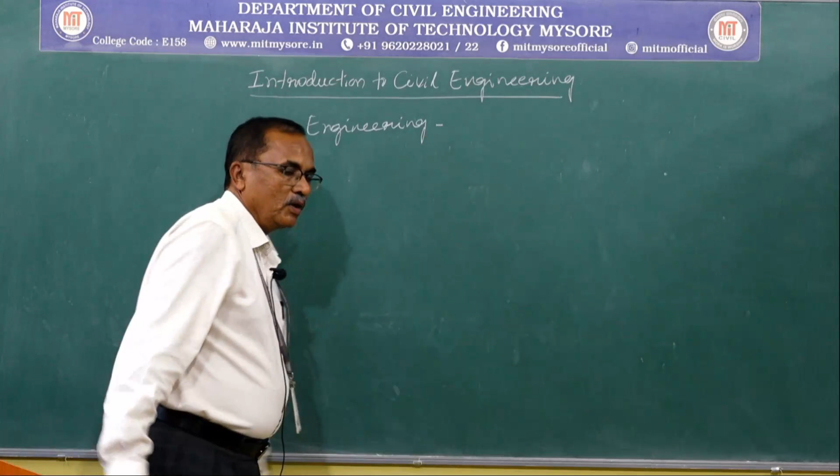Let us start with the meaning of engineering. Engineering is the use of science and mathematics for appropriate application.

Then after understanding engineering, let us understand civil engineering. Civil engineering, as the name itself implies, is for the civil society. Civil engineering is the professional practice of planning, analysis, design, construction and maintenance of various infrastructural projects.

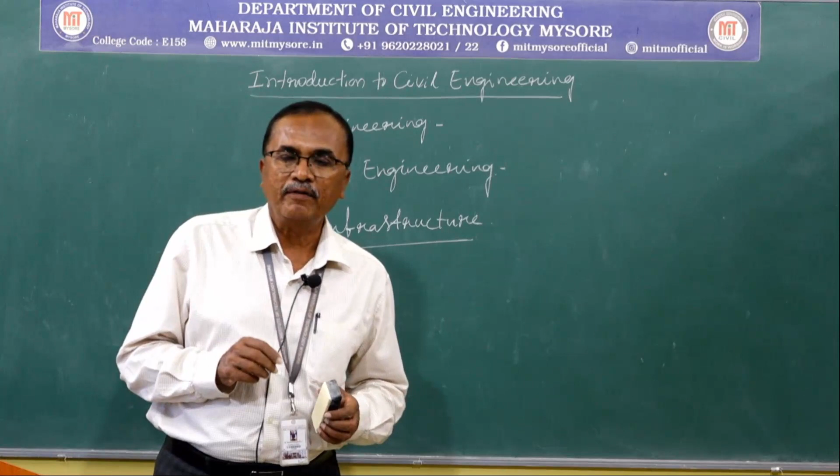What is infrastructure? Infrastructure is a set of facilities required for the socio-economical development of a society, in particular a state, a country, a globe in general. Socio-economical development of a country purely depends upon infrastructures.

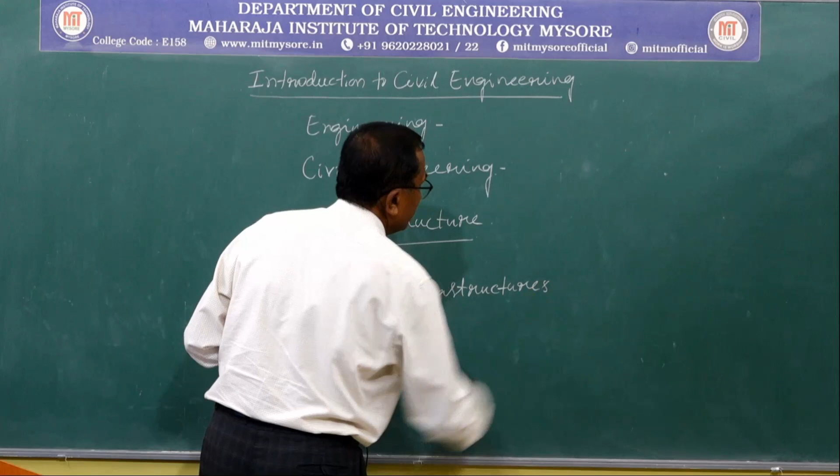Infrastructures are of three types, namely hard infrastructure, or structures, physical facility provided. Here we provide physical facilities such as...

roads, railways, airways, waterways, bridges, tunnels, etc. These are all the physical facilities.

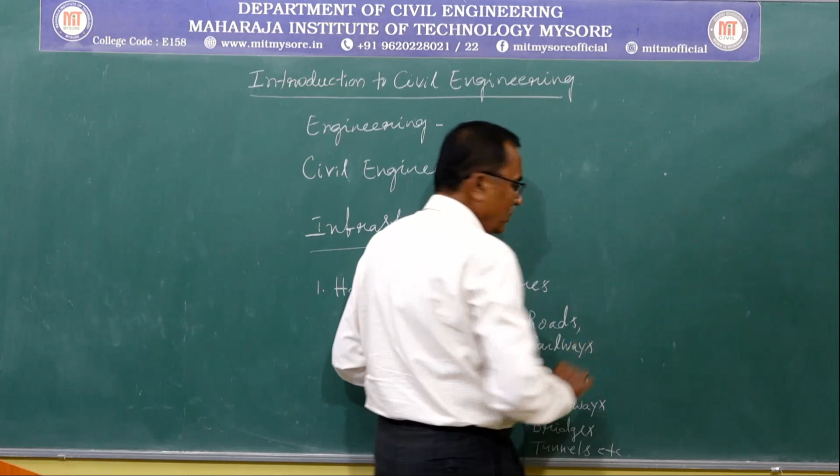Roadways, nowadays we know that it is road facilities. Good road facilities are the economical boon. Wherever we find the good road facilities, there we can automatically find the socio-economical growth of the country.

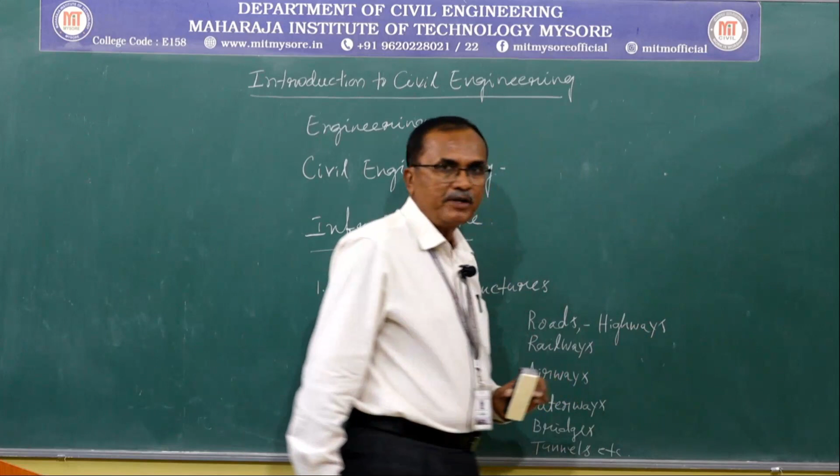Roadways, varieties of roads we come across highways of different categories or expressways. Similarly, railways, airways including airfield, airport.

Then waterways including the seaports. Seaports means it is there we are going to land the ships and all cargo operating vessels.

The bridges which connect, which shorten the communication of road transportation or railway station transportation. A tunnel, again, is a means of communication to carry or transport vehicles, to transport water from one side to the other side, and so on and so forth.

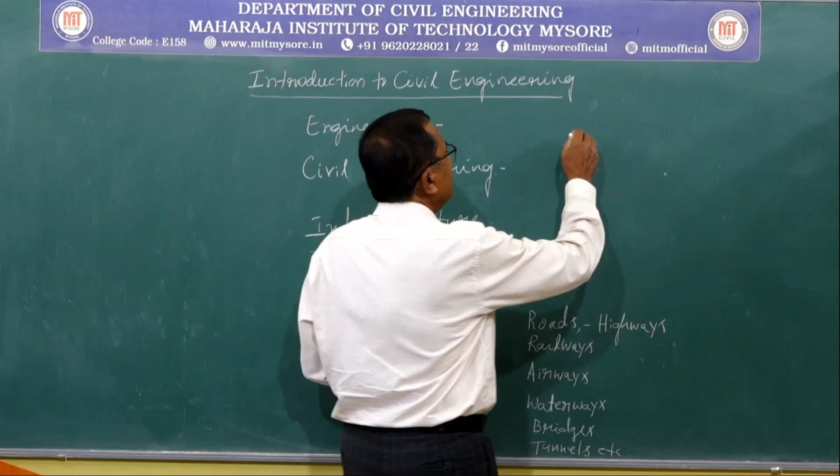The second type of infrastructure is soft infrastructure, human resource and institutions, which monitor the economy.

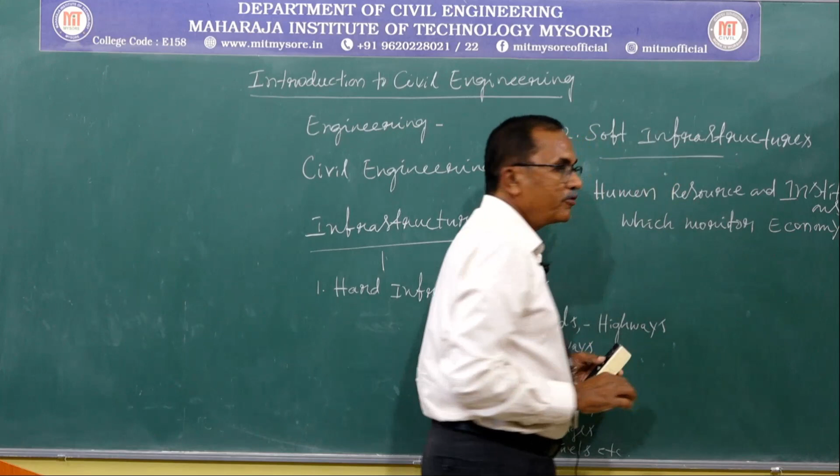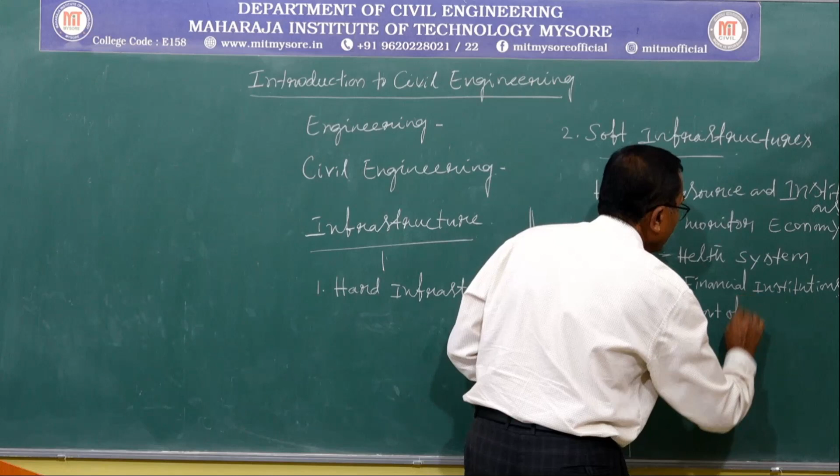The soft infrastructures include financial institutions, government offices, education institutions, law enforcements. Health system is coming under health system - it is hospitals, educational institutions, again finance institutions such as banks, government offices, various government offices, educations, varieties of educational institutions, professional, non-professional, higher and lower education systems, then law enforcement such as the police forces.

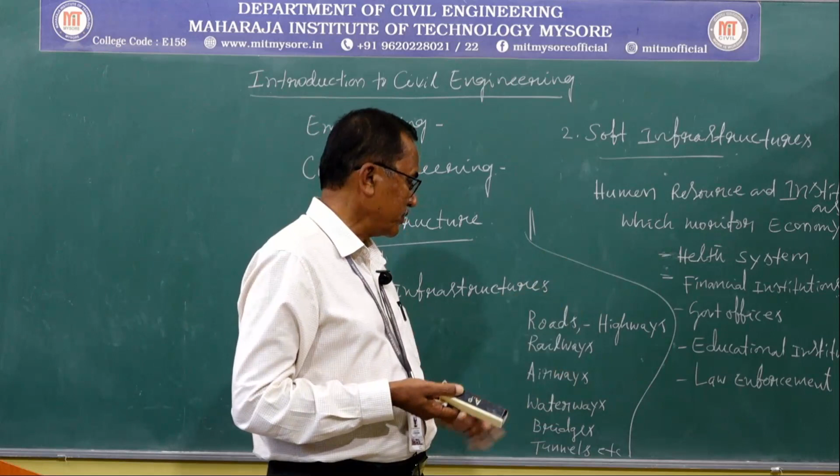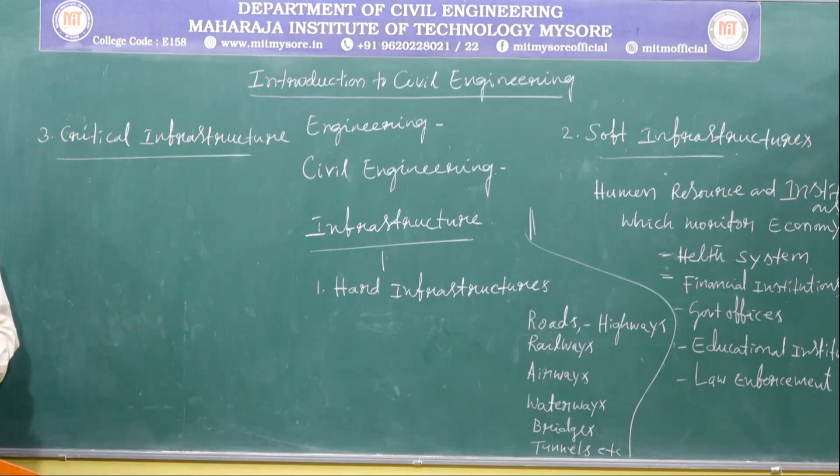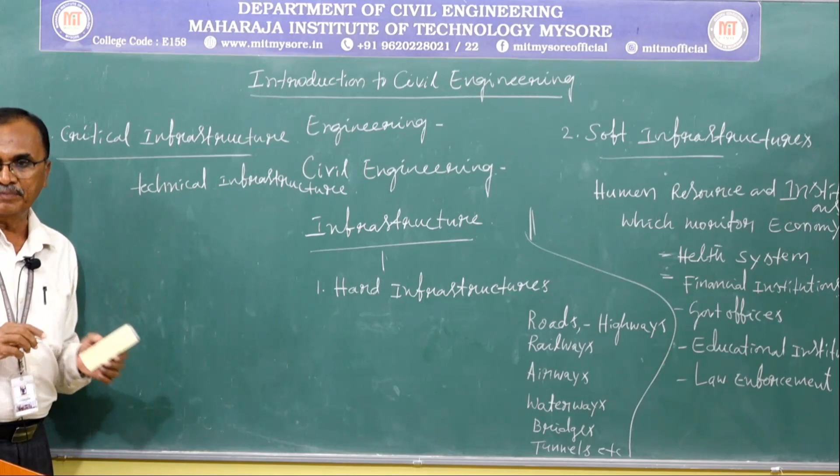And the third infrastructure is critical infrastructure. Critical infrastructure, basically they are all technical infrastructures. Here sophisticated technology is involved in providing technical infrastructures, involving networking, cable connection, power supply, and power grid.

Then transport system, traffic management system, and the last one is water supply and sanitation. Infrastructure means set of facilities required for the socio-economical development of a society or country or nation or the world.

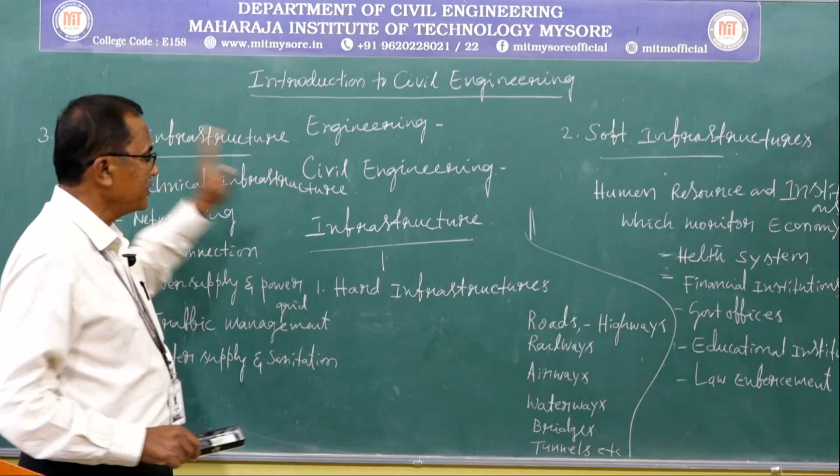Various infrastructures are broadly classified into three categories, namely hard infrastructure, soft infrastructures and critical infrastructure. Hard infrastructures are physical facility providers, namely roads, highways, varieties of highways, railways, then airways, waterways, bridges, tunnels. Here railways, airways, waterways include both rails, roads, buses and vehicles, aircrafts, and waterways include ships, containers, etc.

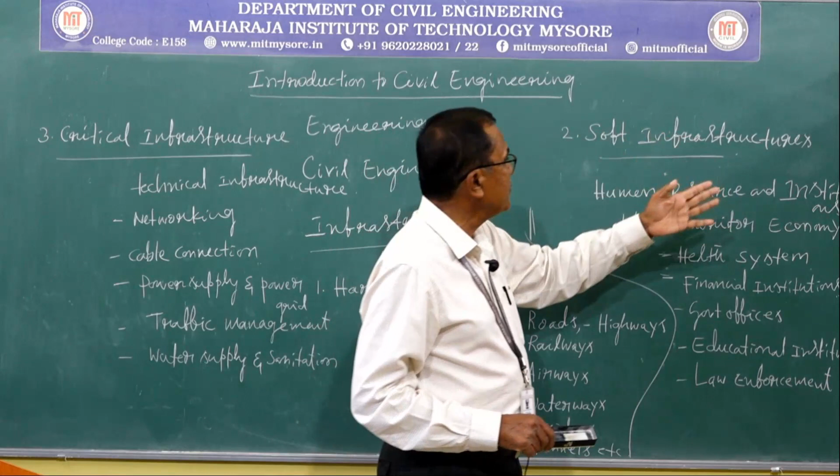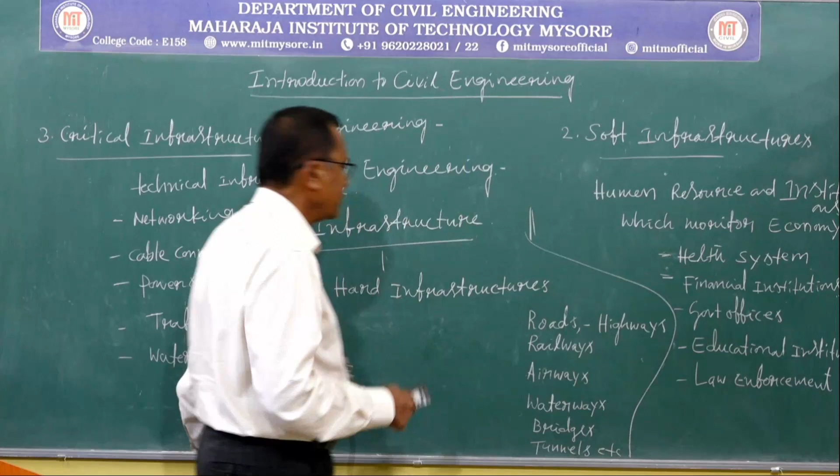Again, soft infrastructures are human resources and institutions which monitor the economy. So soft infrastructures are health system, financial institutions such as banks, government offices, educational institutions, law enforcements, mainly judiciary and the police force requirements and their infrastructure.

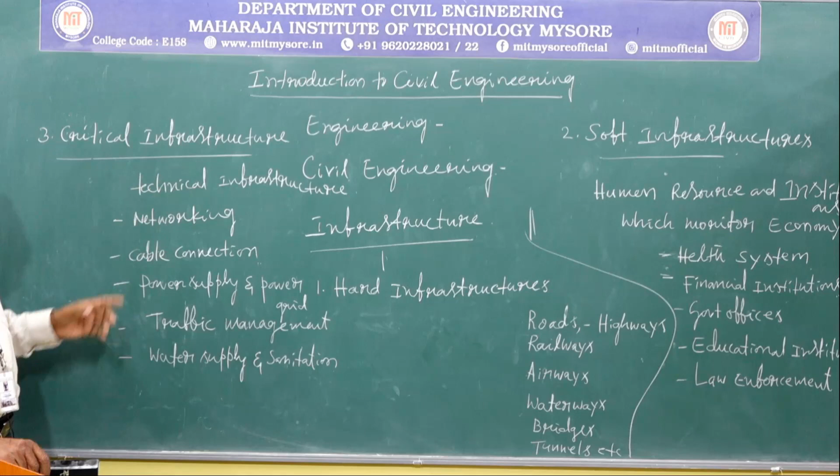Next it is critical infrastructures or technical infrastructures, and here sophisticated technologies are involved in providing this critical infrastructure. The most commonly used critical infrastructures are networking, cable connection, power supplies and power grid system, then traffic management system and water supply and sanitation.

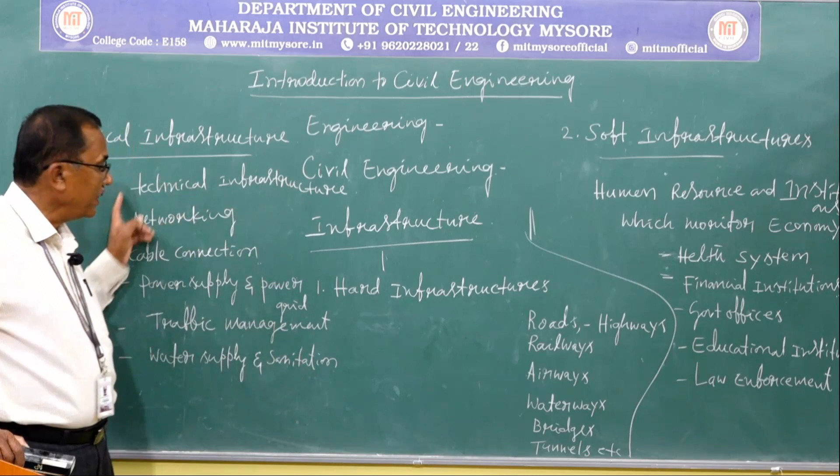These are all dynamic in nature. Critical infrastructures are dynamical in nature. Instantaneously, within a short duration of time, it is possible to provide this infrastructural facility wherever its requirement arises. We have seen varieties of these infrastructures. Civil engineering plays a vital role in providing all these infrastructures.

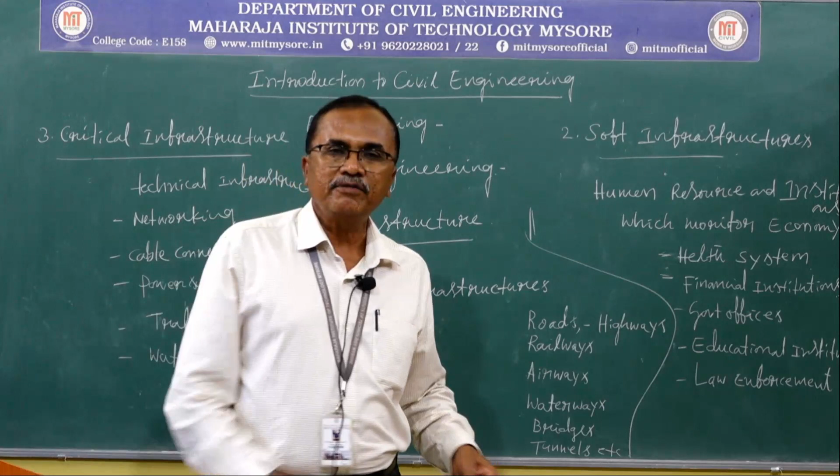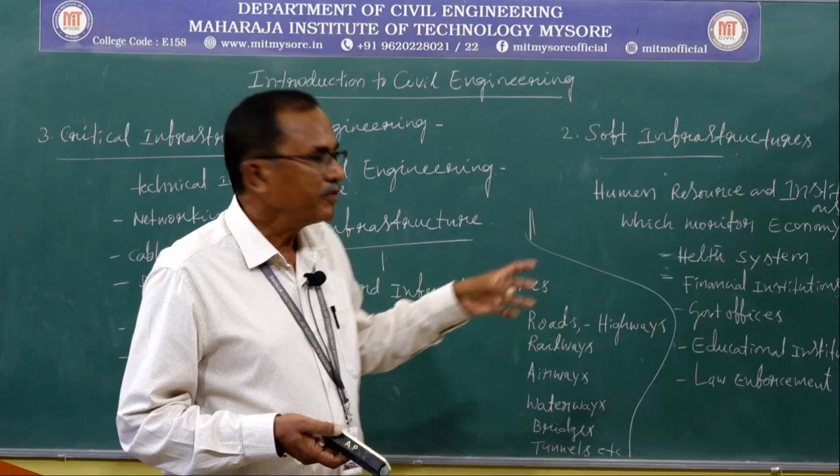The stakeholders should know about all these varieties of infrastructures in order to inculcate or understand the various infrastructures involved. Students, society, industry - these infrastructural facilities are included in the Introduction to Civil Engineering course. Every engineer, irrespective of the stream of engineering, should know about these infrastructural facilities.

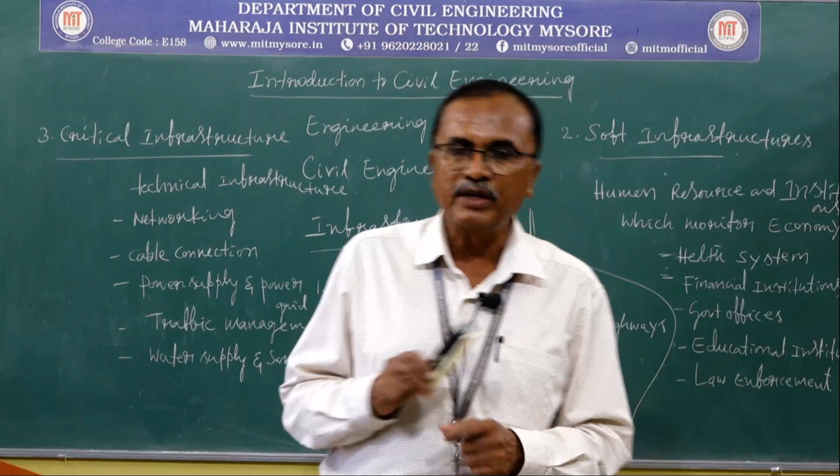A car owner should know at least driving rather than car manufacturing. Likewise, a road user or infrastructure user should know about the infrastructures rather than constructing roads. That's why this infrastructure facility is included in Introduction to Civil Engineering.

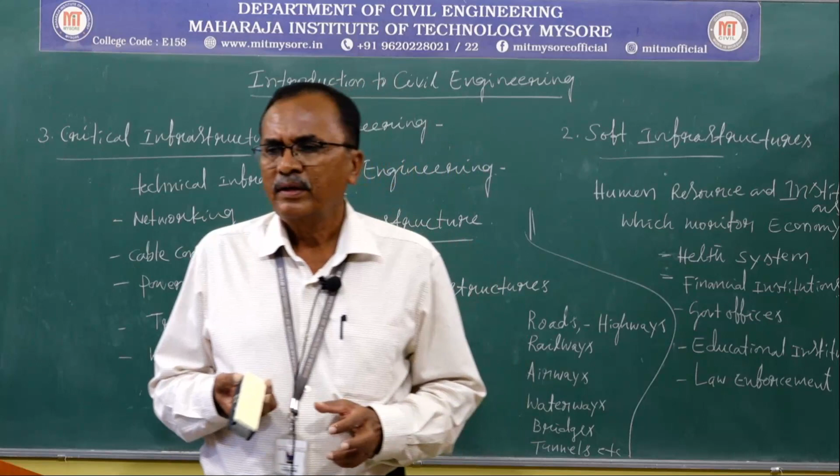These infrastructure facilities related topics you are going to study in the first and second module of Introduction to Civil Engineering. And to facilitate all these facilities, some specializations will be introduced, namely: in order to prepare planning and to prepare the map, we use the surveying specialization; and to study the movement of water, to store the water and construct dams, it is taken care of by hydraulics and water resource engineering.

Different types of foundation required depend upon the type of soil, which will be dealt with by geotechnical engineering. Design, construction and maintenance of various structures and structural elements will be carried out by structural engineering.

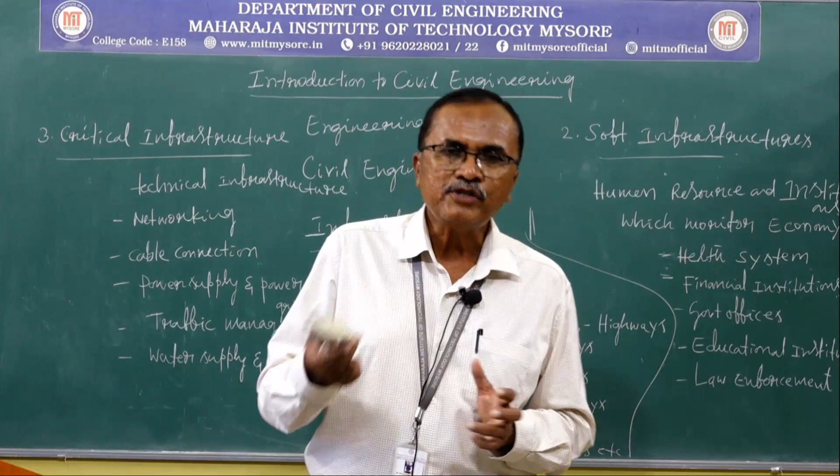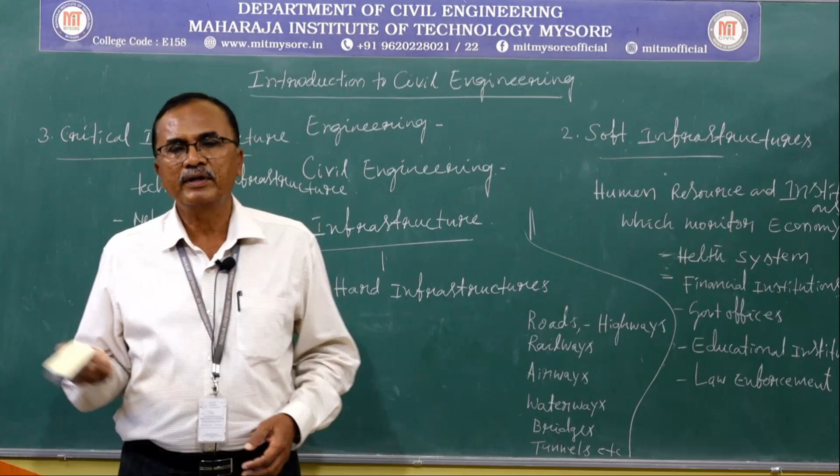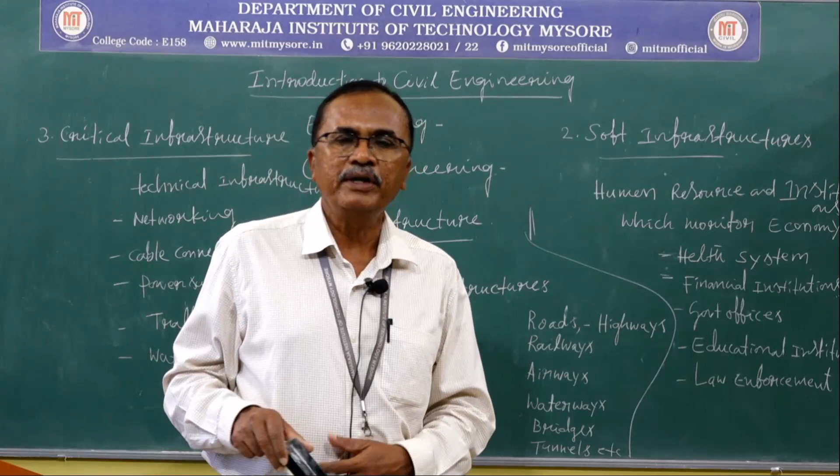Road requirements, railway requirements, construction, maintenance and usage of these facilities are handled by transportation engineering. The quality of water and wastewater, its use and disposal, is presented by water supply and sanitation engineering in terms of environmental engineering. All these specialized topics will be introduced briefly for better understanding, and later this concept will be used whenever you use these infrastructural facilities.

Apart from these infrastructural facilities, you are going to be introduced to a concept called engineering mechanics in the third, fourth and fifth modules. Engineering mechanics is a physical science which deals with the condition of rest or motion of a body or element of infrastructure. Here you will learn about force, system of force, types of forces, equilibrium condition, resultant, composition of force, resolution of force and so on.

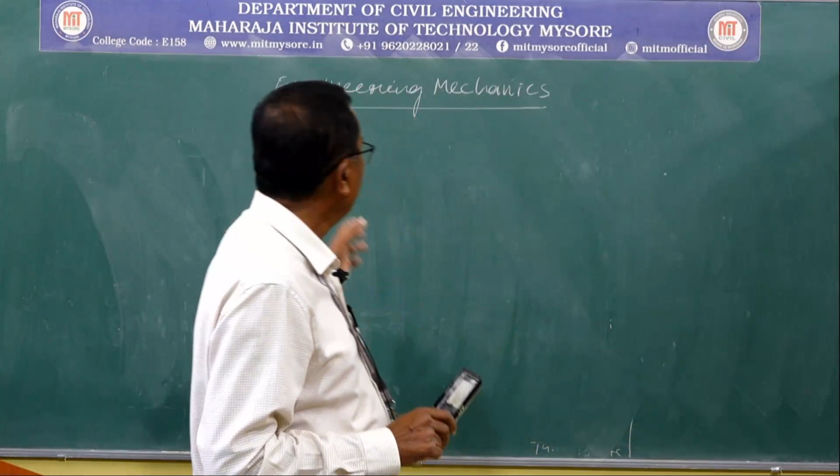In addition to these, before understanding force and its auxiliaries, you will study ideal conditions. The most commonly used idealization terminologies are point force, rigid body, particle and so on. In addition, you will also learn about centroid and center of gravity and moment of inertia.

All these engineering mechanics concepts, irrespective of the type of engineering, will be used in your day-to-day engineering life. They should remain memorized and stay with you till the last of your engineering career. It is an easy subject, very interesting, important, and a scoring subject in the examination. Various specialized faculty will handle this subject. Thank you for your patient listening. Wish you all the best.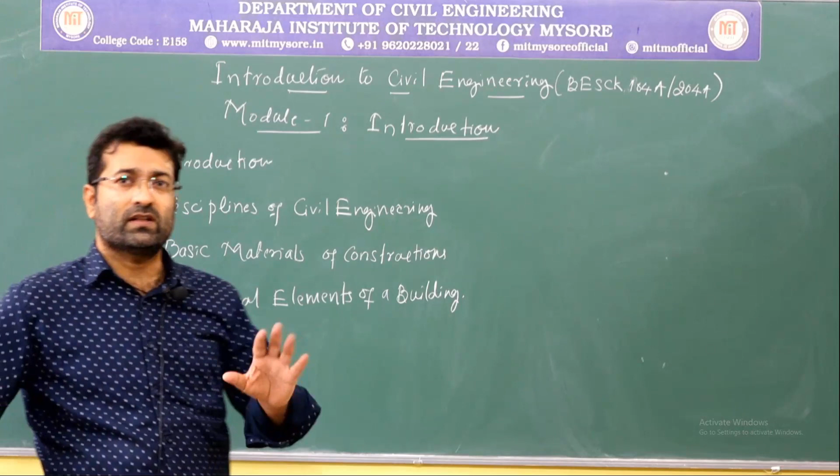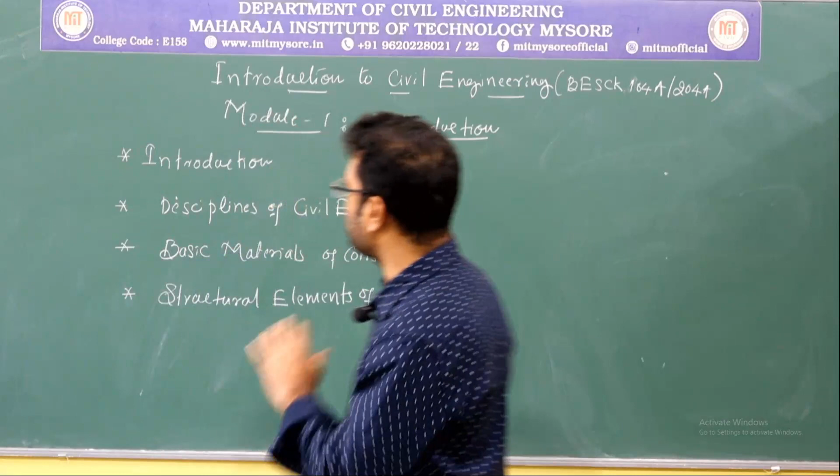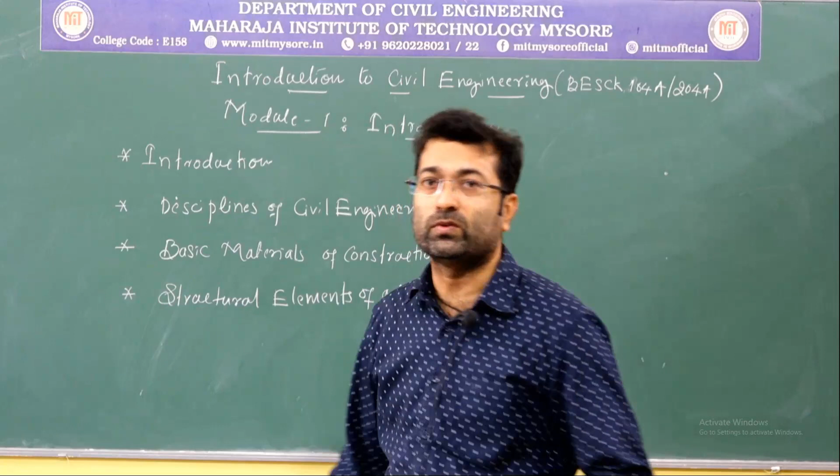It is common for many different branches in the VTU. I will be concentrating on the first module, which is Introduction. In this chapter, I am basically going to cover four different topics: introduction about the subject and civil engineering, discussing different disciplines in civil engineering, then materials of construction, and different structural elements of a building. So these are the four topics I will discuss in this module. Today I will concentrate on the introduction part, that is introduction to civil engineering.

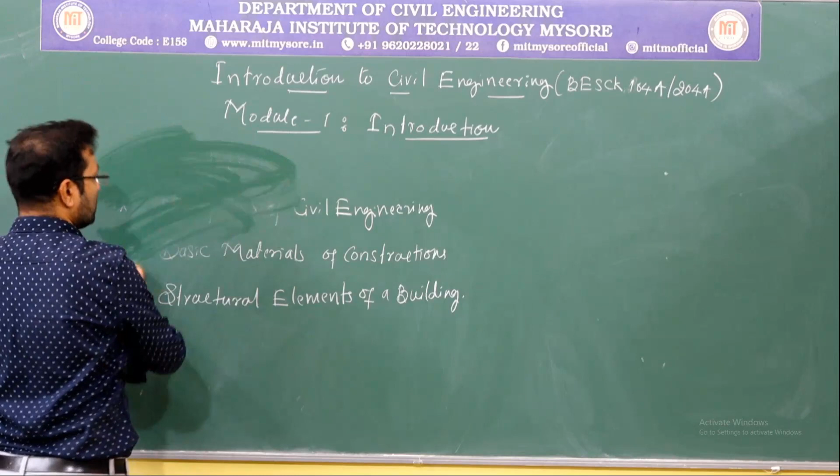So what is civil engineering, first of all? What is meant by civil engineering? Civil engineering is basically an art. It is an art of utilizing natural resources for the purpose of human habitation.

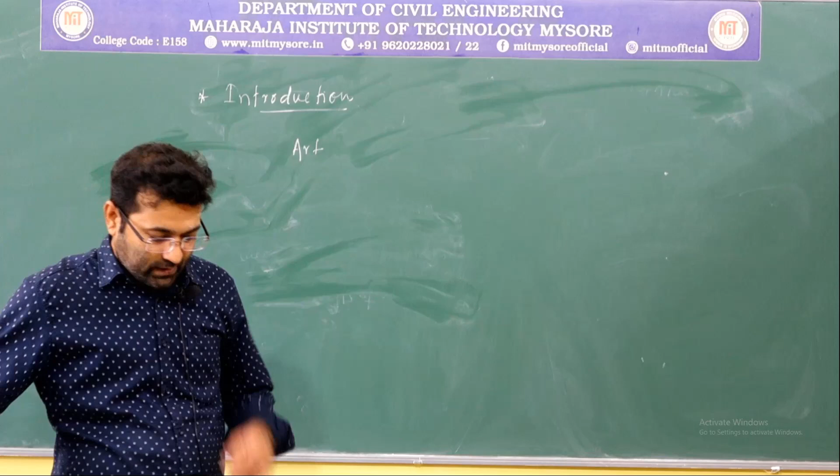For example, if I want to construct a house for residential purposes, what all different materials are required? I basically need many construction materials, like stones, wood, bricks, cement, sand. Many of these construction materials are naturally available, so I am utilizing naturally available materials. Apart from naturally available materials, we also make use of manufactured materials, like cement, concrete, or steel, which are again manufactured from naturally available materials. So basically civil engineering is an art where we utilize natural resources for human purposes, like residential purposes, water consumption, or any other industrial purpose. We are constructing things for the purpose of human needs.

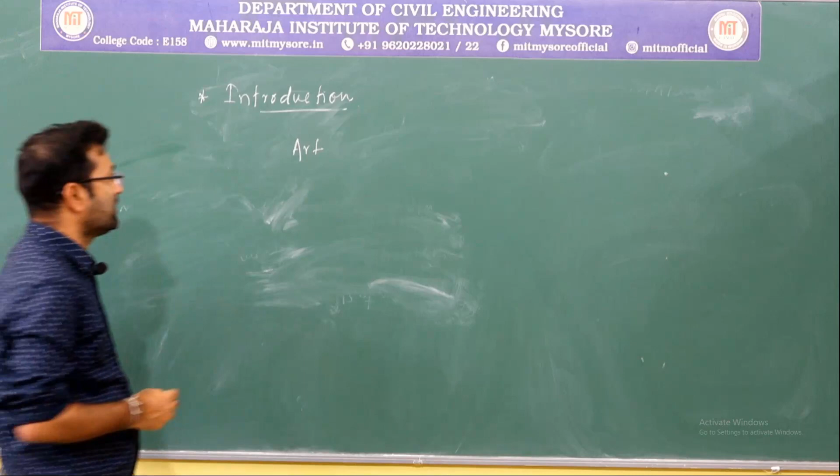So now, why do we need a civil engineer? Why is a civil engineer required? Can't we do all these things without a civil engineer? Do you really think a civil engineer is required? If you ask me, my answer is yes, we need a civil engineer. Without a civil engineer, we cannot go for any construction activity.

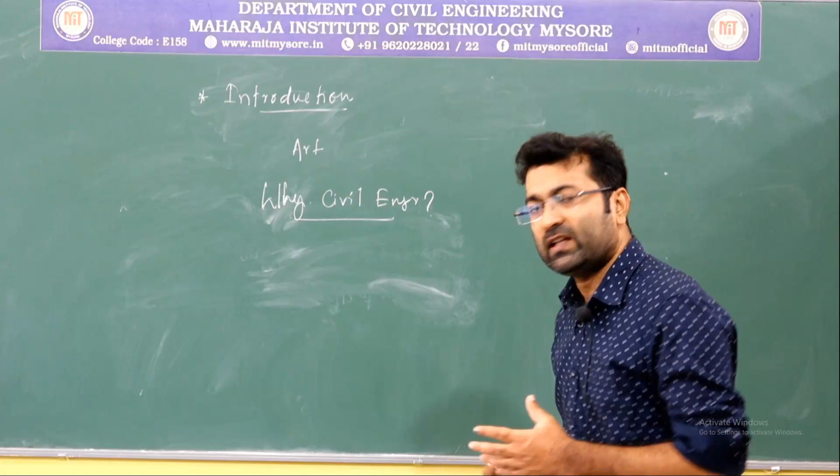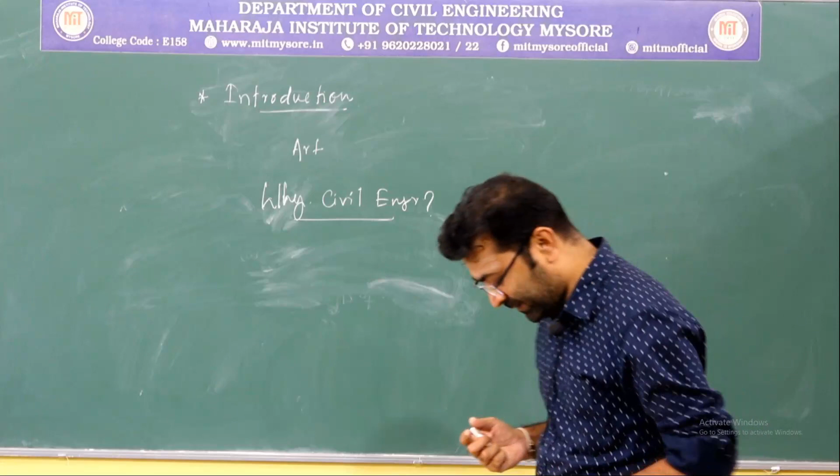The reason is, if you want to construct any structure, either it may be a residential structure, a building, a commercial building, a dam, a bridge, railways, roads, or any construction, any construction activity involves many different activities. It is not just one simple job, it involves many different activities. For example, if I want to construct a building, what are the different roles, responsibilities or activities we need to perform? Starting from surveying, then planning of the building, execution, finishing - there are many different types of activities involved.

Without an engineer, it is very difficult for any construction activity to be done. Even a common man can do the things, but it will not be economic, and those construction activities will not be performed economically. To achieve economy in any construction activity, the role of a civil engineer is very important. Without a civil engineer, we cannot do things properly.

For example, whenever I want to construct a school building, a college building, or an institution building, we should know the basic requirements in that building, so that a civil engineer can do the planning properly based on the requirements, then we can execute the things. If we are not a civil engineer, we will not know the basic requirements in a building. Then the planning and execution becomes very difficult, and even those kinds of buildings cannot be used properly, they will not function properly.

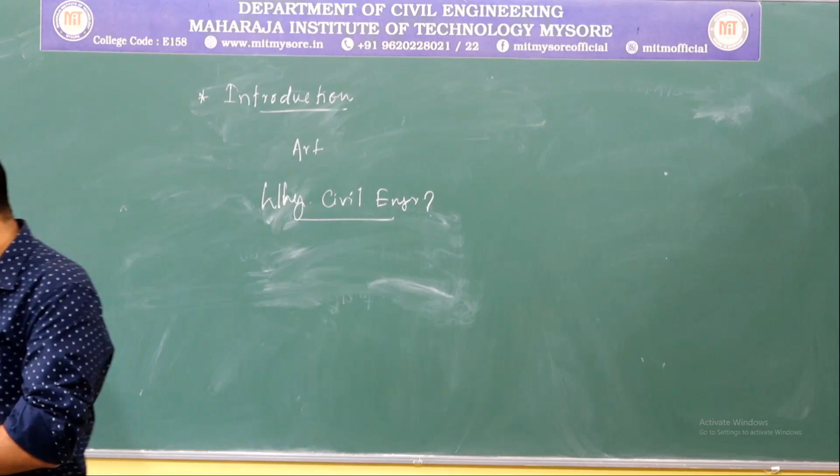Now, if I move on to the next topic, that is, what are the different disciplines in civil engineering?

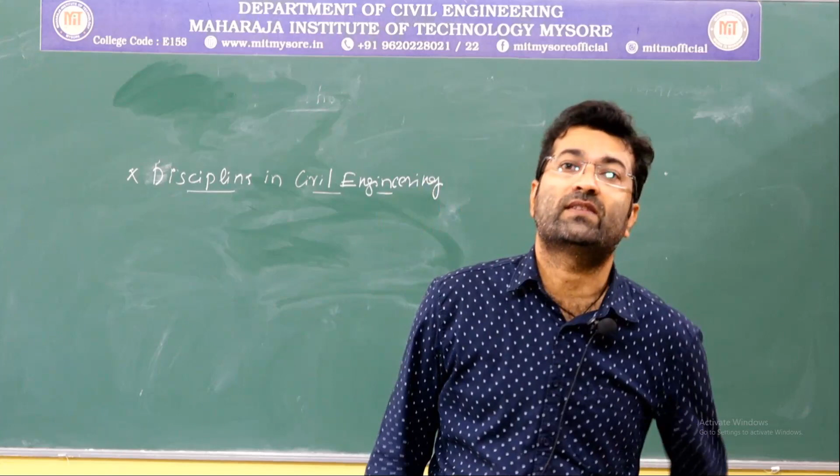What are the different disciplines in civil engineering? There are many different disciplines, or you can say fields, in civil engineering. It depends majorly on the type of construction activity. Here I would like to take an example of building construction, and we will be discussing the different fields in civil engineering.

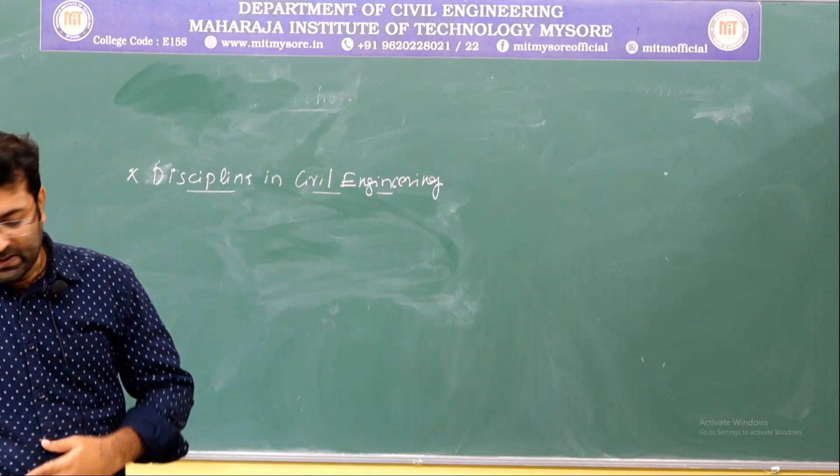If I want to construct a building, basically a residential building, it involves many different steps. The first step is, whenever we want to construct a building or any structure, the first duty is we should know how much area is available for the construction. So the measurement of the land or the area available, whether it's a residential building or any kind of building, wherever we are constructing, first we should know how much area is available. This measurement of the area deals basically with the field called surveying.

The first field or discipline in civil engineering is called surveying. Surveying is basically the first duty or job in any construction activity, where we will be measuring the area. It is basically the horizontal measurement of the ground or the land available for the construction area. The one who deals with all these measurements of the land and puts the entire area on paper, that is the job of a surveyor. So this is the first branch or field in civil engineering, surveying, which deals with the measurements of the land.

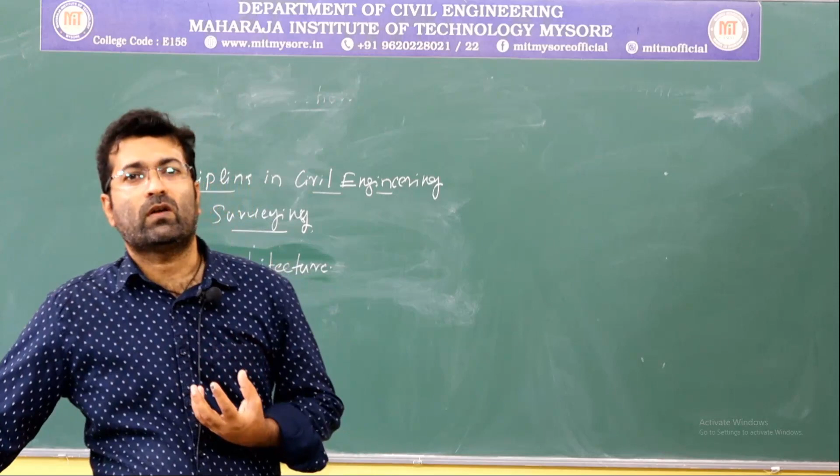Then the second branch or field in civil engineering is architecture. An architect is the person who basically plans the different components in the building. For example, if I want to construct a residential building, I should know where the different components of the building are - like bedrooms, living area, kitchen, bathrooms, puja rooms. So all these are the different components in a residential building. The architect is the one who fixes all these components of a building within the available area.

Nowadays architecture has gained more importance. That is why, instead of being just a part of civil engineering, architecture has now taken an important role and has been made into a different branch called architectural engineering, though it is basically a part of civil engineering. So surveying is the measurement of the land, and within that available land, the architect fixes the different components of the building. After architecture, the next important field in civil engineering is structural engineering.

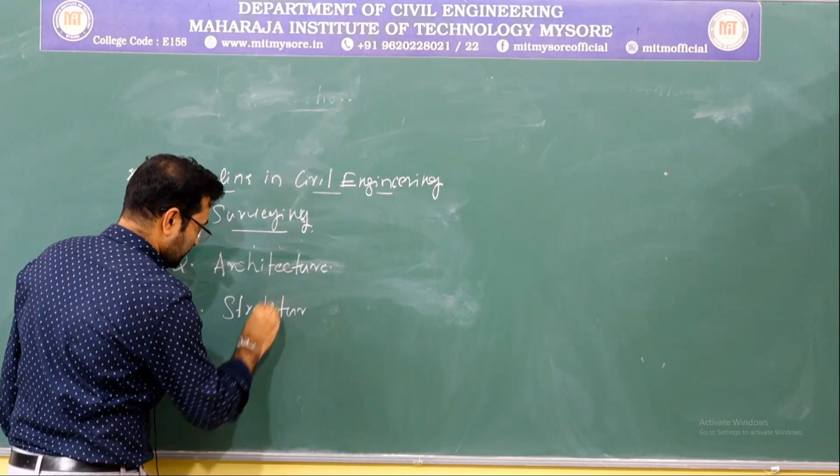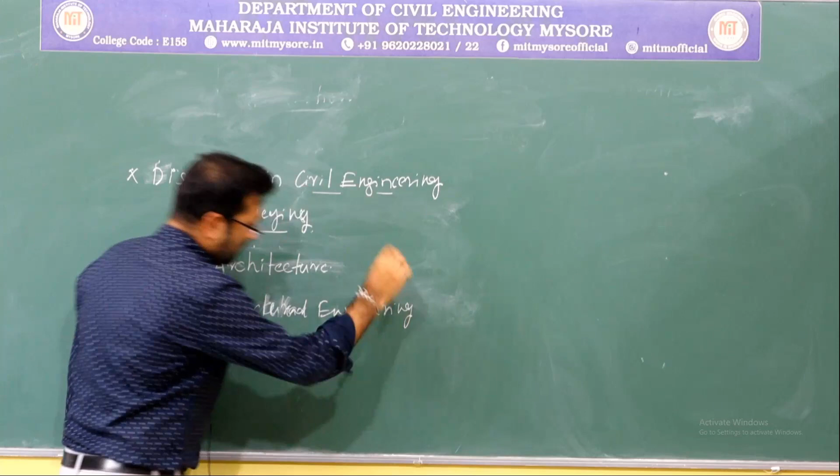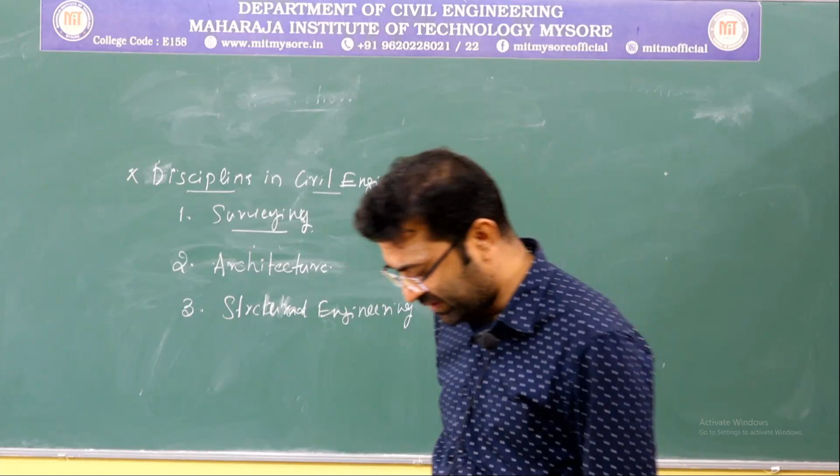Structural engineering is one of the main components or branches in civil engineering, where the entire structure stands on the structural components of the building. For example, if I take any building, the structural components are like foundations, columns, beams, and slabs. All these are the structural components, and these are important components in the building which carry the load, or transfer the load from the superstructure to the substructure. Ultimately, whatever load the building has is transferred to the ground through these components. Designing these components will be done by a structural engineer.

The structural engineer is the one who decides what should be the geometrical dimensions, like the sizes of the beams, columns, slab and foundations, and also what should be the percentage of reinforcement we need to provide in the beams, columns, slabs and footings. So we can say this is the bones in the body which takes the entire load.

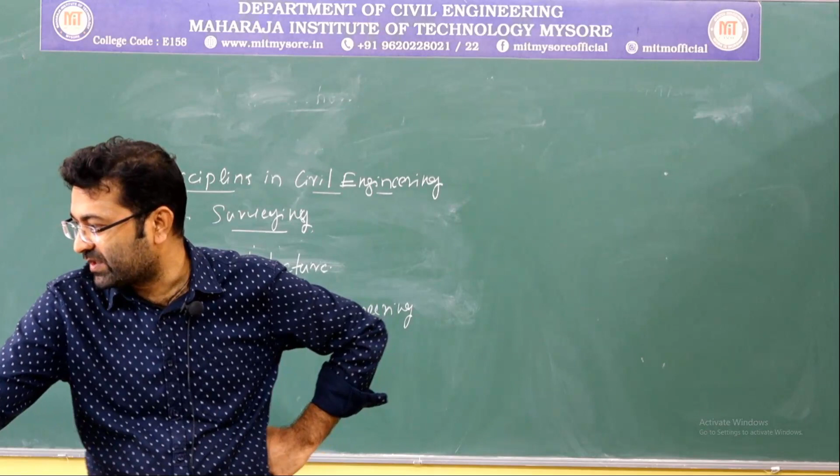So the structural engineer has the most important role in any structure, as he is the one who decides whether a building is safe or unsafe for the superimposed loads. After structural engineering, the next one is geotechnical engineering.

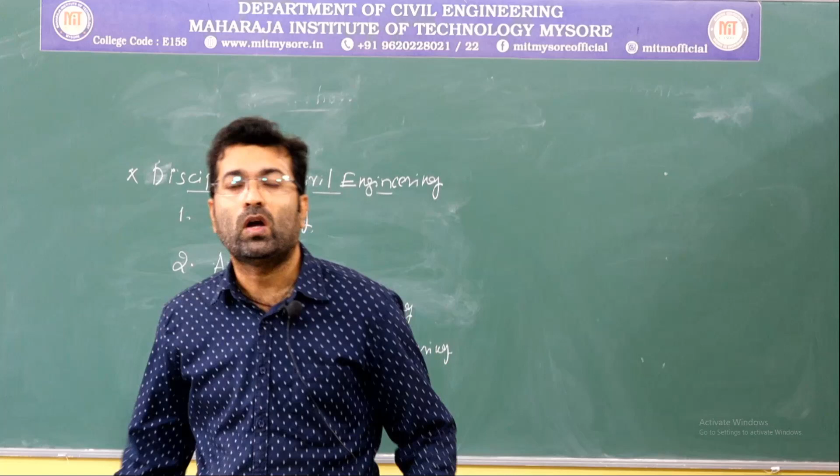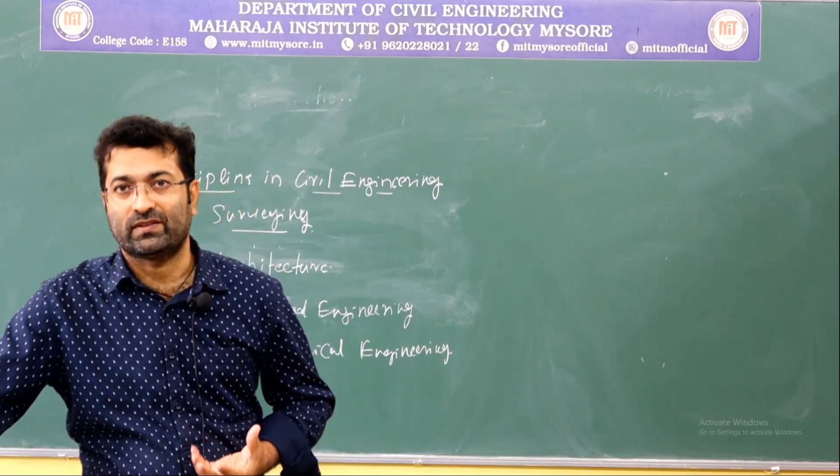The role of geotechnical engineering in civil engineering is very important, because all the structures we construct are standing on the soil or on the ground. So how the soil reacts when we construct structures is important to know, because in different locations, soil is of different kinds, and these soils behave differently for many reasons. For example, take a black cotton soil: the expansion and contraction is very huge, so we cannot construct structures on black cotton soils very easily.

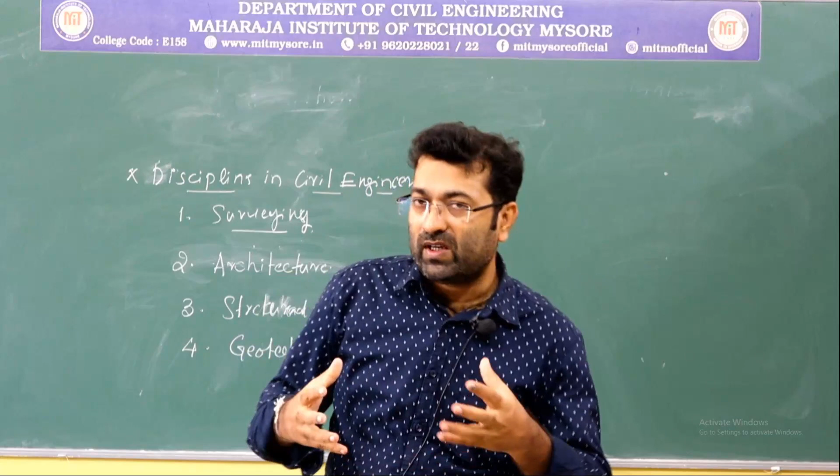We need to treat the soils. So the one who deals with the behavior of soils in different localities and during different seasons is the geotechnical engineer. And whenever we construct buildings, those structures have weight, which ultimately we need to transfer to the ground.

Whenever we transfer loads to the ground, the soil has a capacity called load bearing or safe bearing capacity. How much load it can transfer or withstand from the superstructure is decided by the geotechnical engineer. The geotechnical engineer conducts many different investigations on the soil, and finally comes out with what will be the safe bearing capacity of the soil.

Based on the safe bearing capacity of the soil, the structural engineer will design the foundation part of any structure.

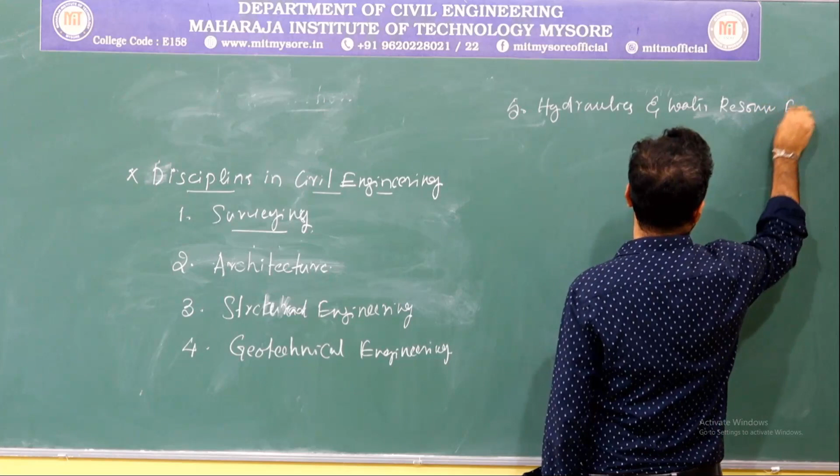The next field is hydraulics and water resources engineering, the fifth field. This is a little bit different in civil engineering, where we deal with water.

Whenever we have a residential community or an industrial area, we need to supply water to it. Supplying water to a community, city, or village involves many steps. First, there should be some source of water, and only then can we supply water to a community or an industry. For example, if I am supplying water to Bangalore, in Karnataka state, what is the source of water for Bangalore city?

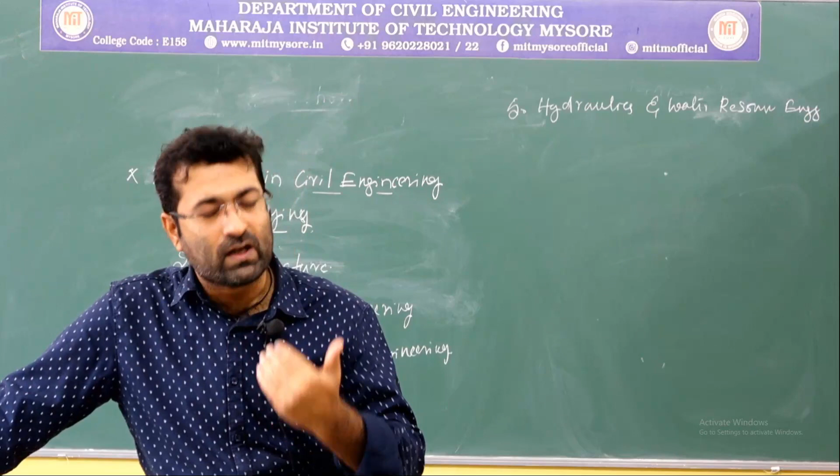The source for the water supply of Bangalore city is the Kaveri river. So when I have a source, I need to transfer the water to Bangalore city, which is around 80 or 90 kilometers away. I need to carry the water from the Kaveri river to Bangalore city, about 80 kilometers away.

A lot of structures are required for this. The one who deals with calculating the water requirement of Bangalore and transferring that water from the Kaveri river to Bangalore is the hydraulics or water resources engineer.

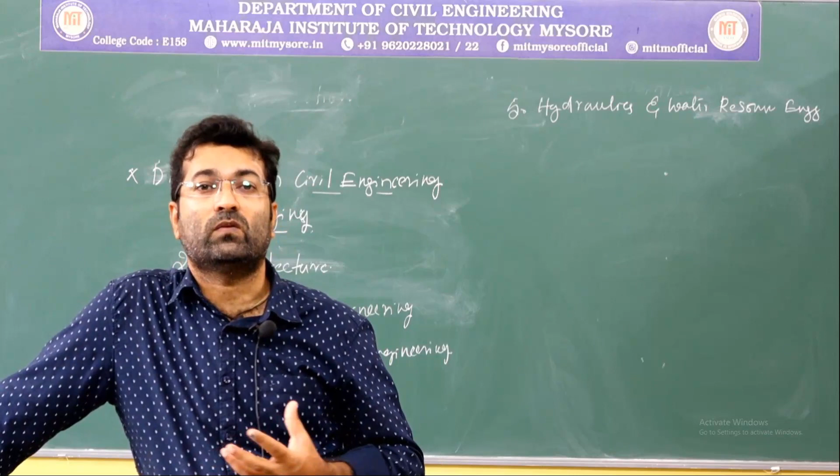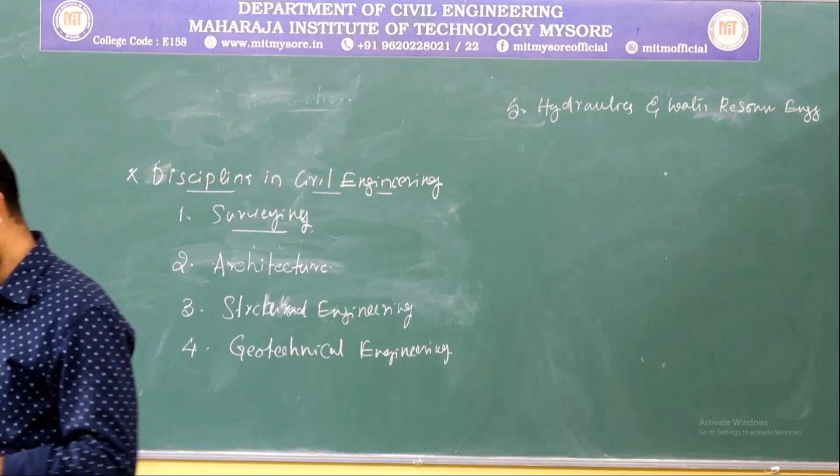They calculate the per capita demand and the total water requirement for a city per day. Based on that, they construct different structures and design pipelines to carry the water from the source to the cities. So the one who deals with all these things is the hydraulics or water resources engineer.

Then the next one is transportation engineering, the sixth field.

When it comes to transportation engineering, this is the discipline dealing with the transportation of goods and people. There are four different modes of transportation: the first one is roadways, the second is railways, the third is waterways, and the fourth is airways.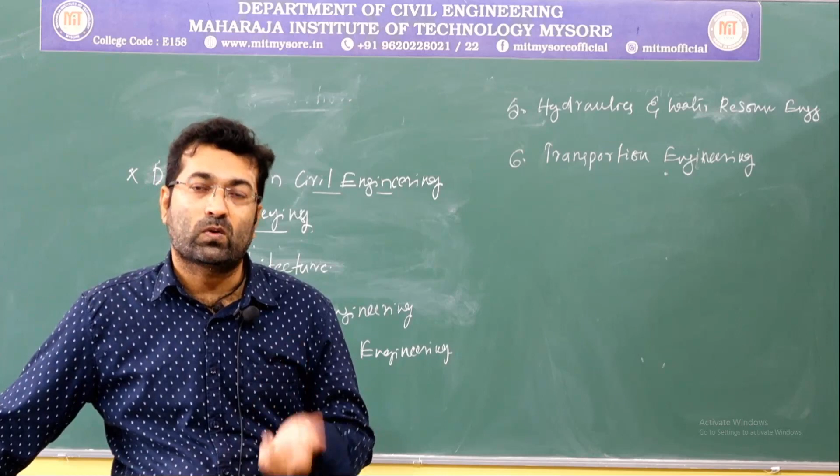The cheapest mode of transportation as of now is waterways, but it is not available everywhere, only in coastal areas. Roadways and railways are the most common modes of transportation, and airways is one of the costliest modes of transportation.

So usually people prefer either roadways or railways. The one who designs the different modes of transportation is the transportation engineer. If I need to transport goods or people from one place to another, for example from Bangalore to Mumbai, then I basically need roadways.

So whenever I am using roadways, what are the different components or infrastructure I need? Basically I need the roads. Then wherever there are obstructions, I may need to construct bridges. Then if I am transporting things by vehicles, I need different stations, like bus stations or other types of structures.

So the one who decides all these things, what should be the width of the road, what speed we need to maintain, all those things - the transportation engineer is the one who basically designs or deals with the transportation of vehicles by any means.

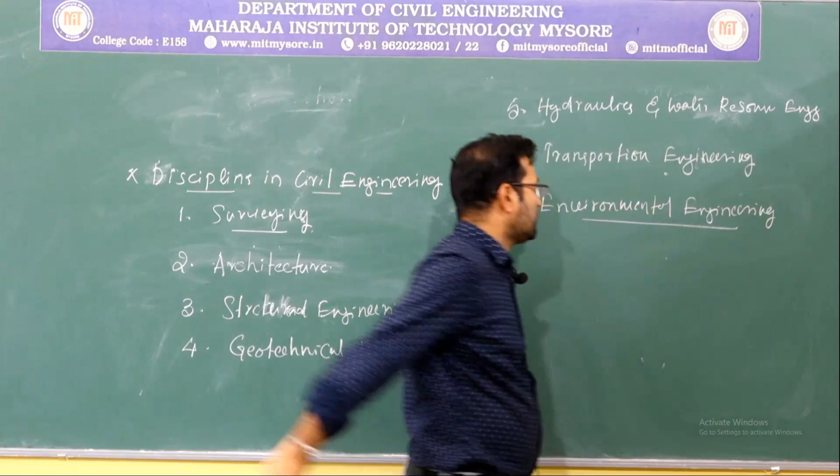The next one is environmental engineering. This is a branch which basically deals with how to maintain a good environment. Whenever we construct structures, especially industrial structures, there is a lot of pollution caused to the environment, so we need to control the pollution caused by different structures which we are constructing.

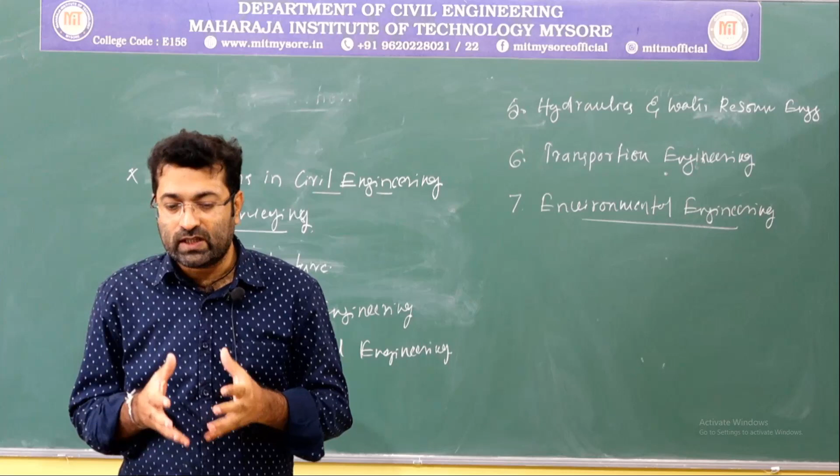As I mentioned with transportation engineering, as we have good transportation systems, the movement of vehicles will increase, which in turn affects the environment. So environmental engineering deals with such environmental issues. Because of construction activity happening, the environment should not get affected to a greater extent. Without affecting the environment we cannot go for construction, there will be some harm, but up to what limit we can cause harm - that is dealt with by environmental engineering.

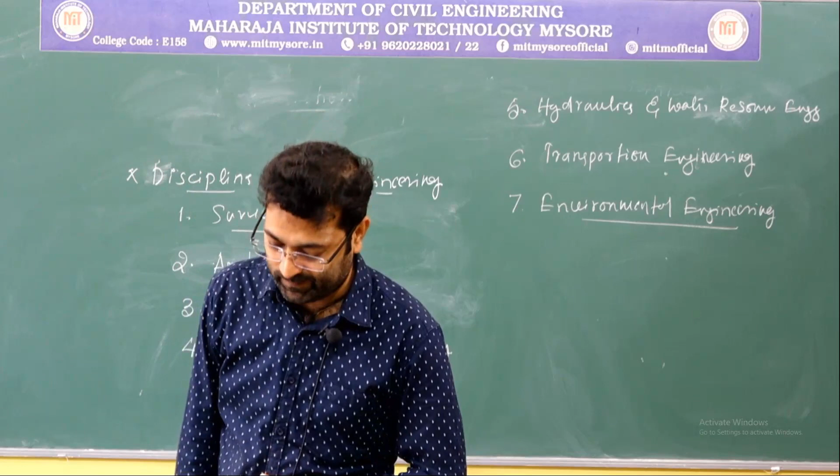Apart from industrial concerns, these are the people who deal with waste water or the waste we produce every day from our residential houses. They deal with how to mitigate these things, how to control the wastages, or how to treat waste water before letting it into natural streams or into nature.

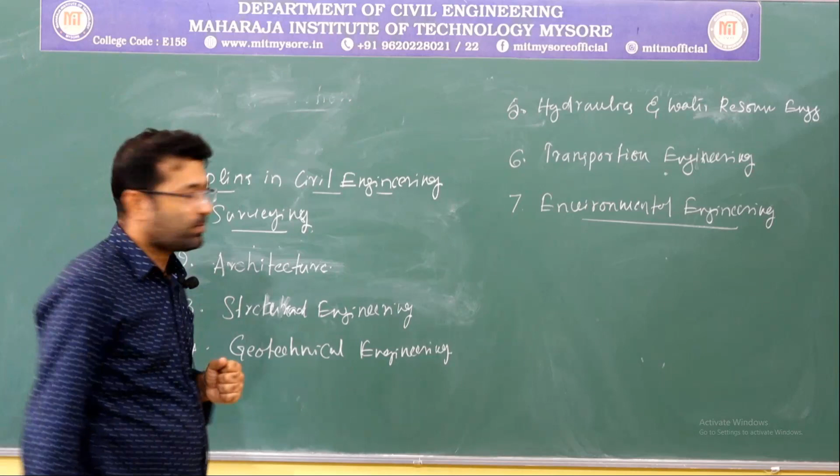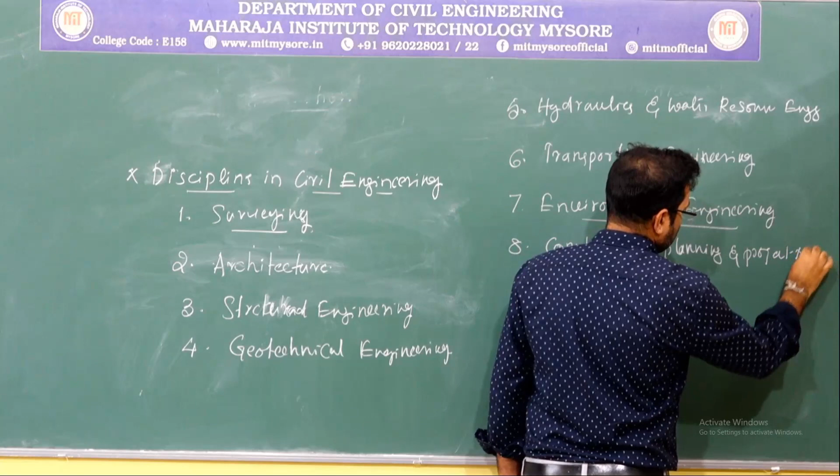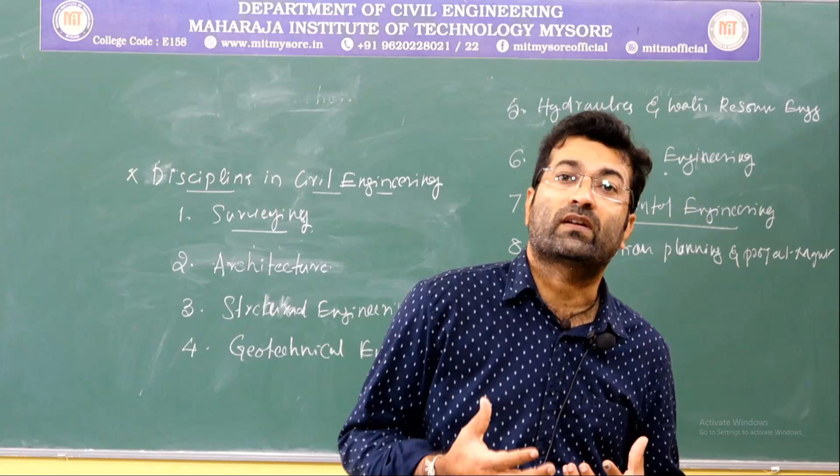Then the next one is construction planning and project management. This is nowadays one of the most popular branches in civil engineering. It is very important, because if you don't plan your construction activity properly, it will get delayed. Whenever there is a delay, or things don't happen properly in the construction activity, it affects the cost of the entire project.

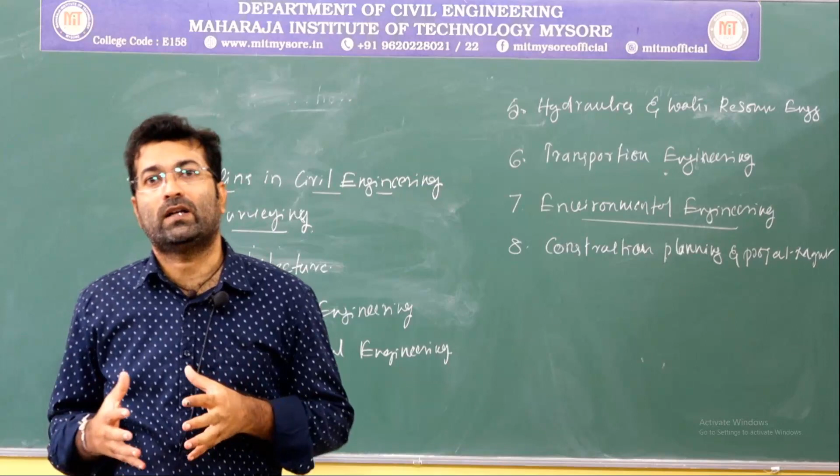So before starting any project, whether a small residential building, a big highway, a metro construction, or an industry construction, we should know the probable finishing time of the work. Only then can we plan all the different activities - starting from planning, excavation, execution, and then finishing - across any project work.

If you don't plan, the cost will get escalated, and the total cost of the project will be very huge, which will be a loss to the owner of the project. So we have to plan projects very properly. The one who deals with and controls the different activities in any project work is the construction manager, or the planning and project manager.

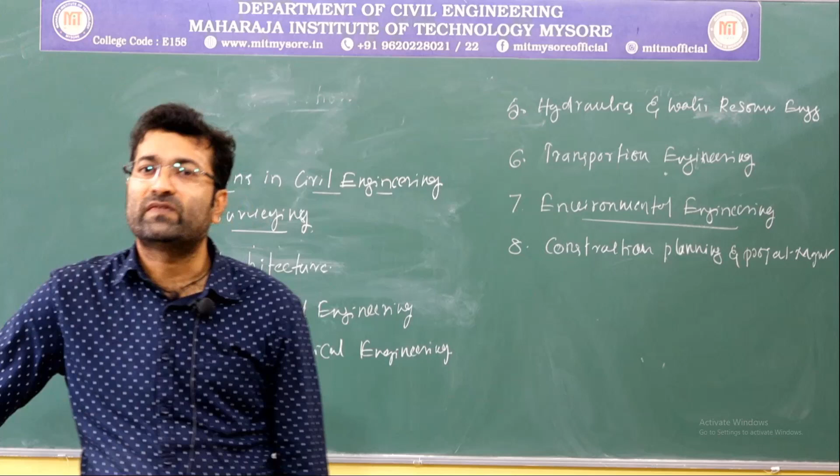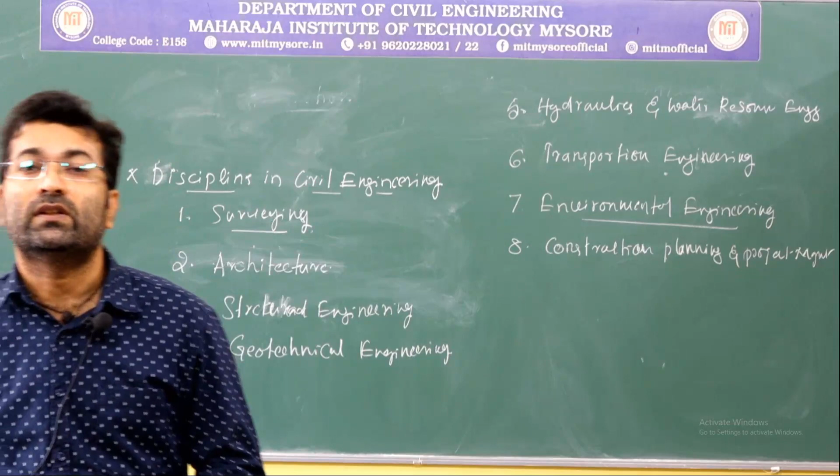So these are basically a few important fields in civil engineering, which are the most important things. Without knowledge of all these different fields, it is very difficult for us to understand what civil engineering is.

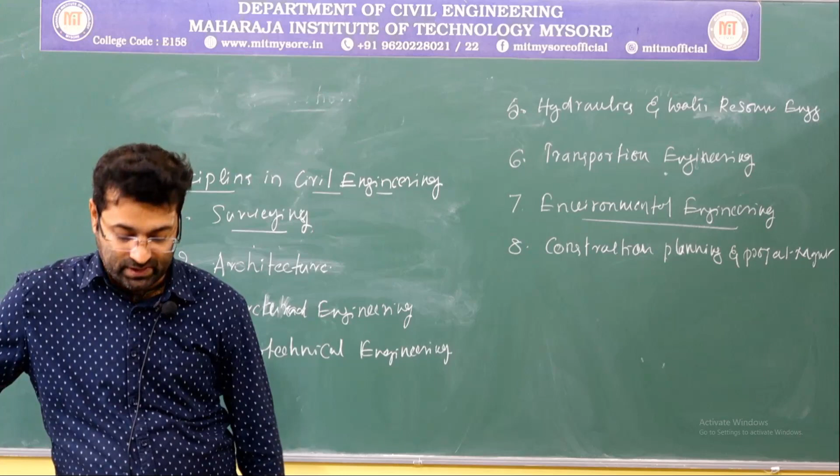The next topic will be the different construction materials in civil engineering, which we will discuss in the next session. Thank you.